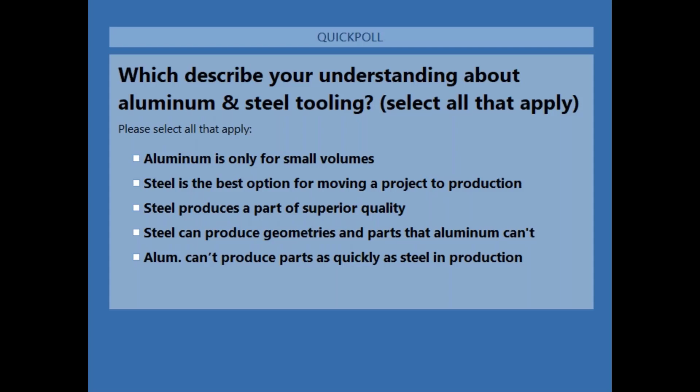So we're going to leave this open here for a good maybe 10, 15 seconds. We'll see as these votes come trickling in, and then I will close and we will look through the answers. Go ahead and get that vote in. Okay, awesome, we're at about 75% have voted. I'm going to give it about 10 more seconds here and then close the poll. So go ahead and get your votes in if you have it. Okay, awesome, I'm going to go ahead and close the poll here, and I'm going to share the results.

So let's take a look here. Everybody can see on their screen, we've got about 48% of attendees today feel like aluminum is only for small volumes. Around a third of you feel like the best option for moving a project to production is steel, as well as feeling like steel produces a part of better quality and that it can produce geometries and parts that aluminum can't. And for the last item, about a tenth of us believe that aluminum can't produce parts as quickly as steel in production. Thank you everyone again for sharing your feedback there. I'll go ahead and hide that and we'll hop back into our presentation.

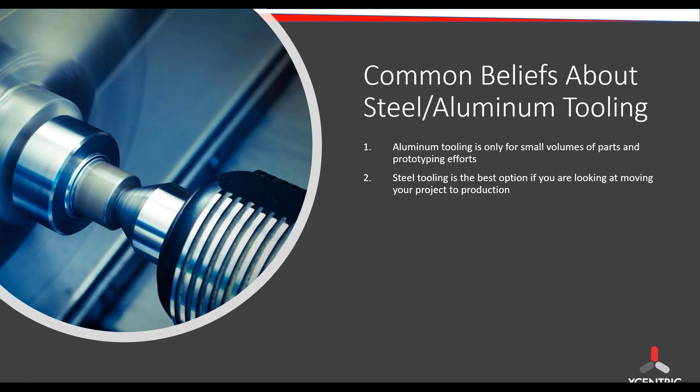So, some common beliefs about steel and aluminum tooling. As you can guess, you've just seen some things relative to exactly this. One common belief is that aluminum tooling is only for small volumes and prototyping, and doesn't work for production. Another is that steel tooling is the best option when moving your project to production, and that steel produces a part of superior quality, can produce geometries that aluminum tooling can't, and that aluminum tooling can't produce parts as quickly as steel tooling in a production setting.

Now one more thing I want to address, which we didn't have in our options, is that the location you choose for creating your tooling isn't a factor in which type of tooling you would be using.

So what I want to do now is serve up another polling question, directly related to that last point. As you can see on your screen, the question is: where the tooling is created has an impact on what mold material is used, true or false? So this one's simple, hit me with a true or false.

Awesome, you guys are flying this time. We're already up at about 75% voted. Give it a couple more seconds here.

Awesome, I'm going to close this one up and share the results with everyone. It looks like about 60% of us on the webinar today feel that statement is true: where the tooling is created has an impact on what mold material is used.

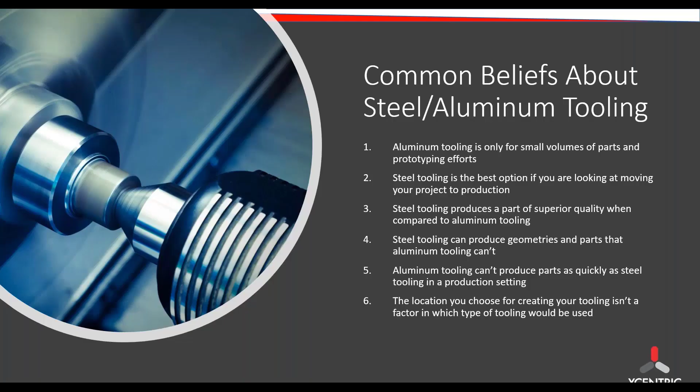Thank you guys, that's super helpful, and it's going to feed right into our next topic here. So let's pop back into our presentation and answer that question: does it have an impact? Yes, where you tool does matter.

Your two major options, as many of you know, are typically going to be the USA and China. There are some other locations, but for our purposes of comparing aluminum and steel, these are the most relevant to the conversation.

The reason tooling location matters is that there are vast cost discrepancies in materials between the US and other countries, notably between aluminum and steel as raw metals in each country. In the USA, aluminum is a much cheaper raw material than steel, making it the default choice for most USA toolers. Overseas, specifically in China, steel is cheaper than aluminum, so the opposite is true, making it the default choice for tooling there.

So I know, as we've all just seen, there's a good split of where we typically get our tooling quotes and orders placed. As you know, in China you typically see a steel tooling quote, and in the US you're going to see an aluminum tooling quote. That's just kind of how it is. So if you're quoting tooling in different locations, you're going to be looking at quotes for vastly different tools. That's the bottom line here.

As a result, you need to be able to make a choice on which one's going to best fit your needs, and be able to compare apples to apples in a scenario where you're actually looking at apples to oranges in terms of the materials.

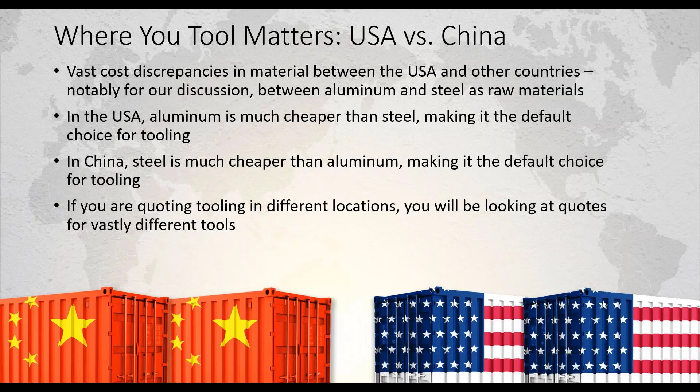So let's talk a little bit about the cost to create and the cost to change your tooling. The cost to create an aluminum tool in the US on average—now realize today there's a lot of factors that go into cost and lead times of injection molding parts, I think we all know that, so wide range of geometries, sizes, materials, all kinds of things—but on average, the cost to create an aluminum tool in the US is going to be a fourth to half the cost of creating a steel tool. In general, aluminum tooling is almost always going to be your most cost-effective option. That is even in my experience when comparing a quote from a China-based vendor for steel tooling to a USA-based aluminum quote. Again, there are a lot of vendors out there, I'm speaking on average and definitely through the lens of where I've worked and where I work now.

Realize that. The second point here is the cost to change. So we talked about the cost to create, now we talk about why it matters that you've had to make a change to your tooling in the past. The cost to make a change to aluminum tooling is roughly a tenth of the cost to change a steel tool, regardless of your location of manufacture. So if you make a steel tool in the US or a steel tool overseas, doesn't matter, it's still going to take typically 10 times the cost to make alterations to that tool. The reason for that is that it's going to take much more time and it's going to be much more difficult, physically speaking, to machine steel versus aluminum when changes are required. As we all know, the reason for that is steel is a much harder material than aluminum, so it's going to take longer and it's going to be a much more difficult process.

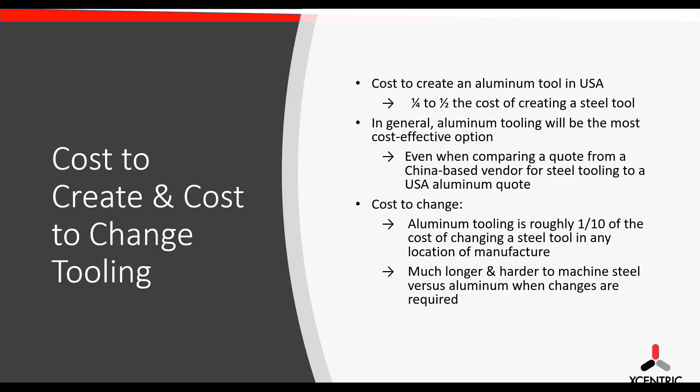So let's talk about, we just talked about the costs, right, to create and change your tooling. What about the time? How long does it take to create an aluminum and a steel tool? And how long does it take to change those tools if you do run into a problem?

Okay, so let's first talk about aluminum. The time to create an aluminum tool, on average, is 15 to 25 business days. That's the time it's going to take to create the tool and have your initial T1 samples to either approve or do iterations on if you need to make changes. Which brings us to our next point.

The time to change an aluminum tool on average is going to be about 5 to 10 business days. So it's going to set you back a week, maybe 2 weeks at most here to change that aluminum tool, typically speaking.

On the other hand, when you're looking at steel, the time to create a steel tool on average is going to be about 35 to 60 business days. Again, in my 2 years of experience of seeing 20 to 40 quotes a day across those 2 years, I rarely ever saw a steel tool below that range in terms of lead times, almost never within a month.

And the time to change a steel tool as well is an important note here. It's usually going to take you about 20 to 30 business days. So not only is it going to take a couple months to make the tool, if you run into an issue and find at T1 samples a problem or later on even, you're looking at 20 to 30 business days, again, going back to how hard that material is to change your steel tool.

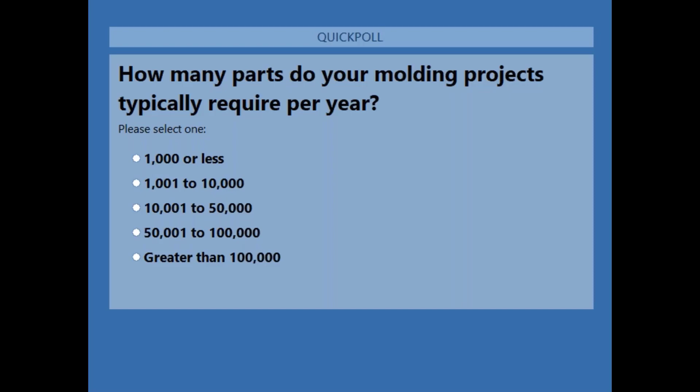Awesome, we're right up at around 75%. Give it a few more seconds here for our answers to trickle in. Awesome, let's close this out here.

Let's share our results. Okay, so you can see what we have going on here. We've got about a fifth of us need 1,000 parts or less per year on their tooling. About a quarter of us are needing somewhere in the realm of 1,000 to 10,000 parts. Another quarter of us from 10 to 50,000. And some of us as well, as you can see here, are needing the greater volumes. So 50 to 100,000 or more than 100,000 parts per year.

Thank you, this was very helpful. And it leads again right into our next topic. So let's talk about your tool life comparison here, okay? So how much volume should you be able to produce with each type of mold?

Sorry, I meant to serve one additional question here. So let's go ahead and serve that too. Let's launch this. Okay, so this question here is going to be which best describes when to use an aluminum tool for tooling.

For prototyping of fewer than 50 parts, for prototyping of up to 500, for production of up to 5,000, for production of up to 25,000, or for production of up to 100,000 parts per year. Give me some votes here, tell me what you think. Awesome, and we've got about 70-75% voting here again. So let's get these last couple in over the next 5 seconds and we'll close it up.

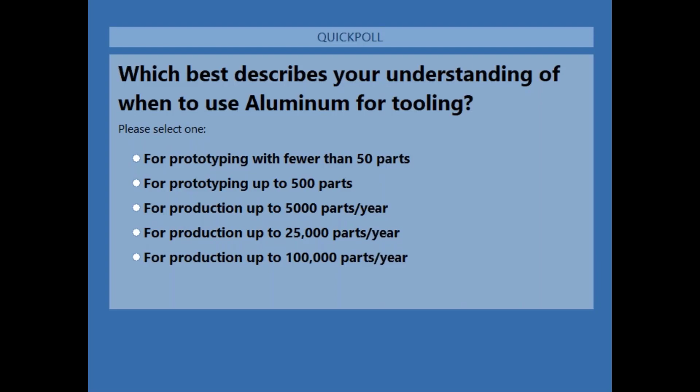We've got about 5% of folks feel like aluminum is for prototyping with fewer than 50 parts. About a quarter of us feel like it's for prototyping of up to 500. Half of us feel like it could go into production of up to 5,000 parts a year. 13% feel like it could get to production of up to 25,000 parts a year, and 3% of us feel like it could get all the way up to 100,000 parts per year.

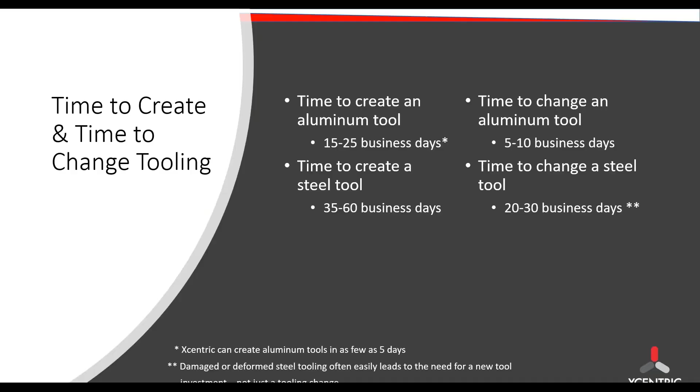So tool life comparison again. Let's figure out how many parts you can get from each type of tool. When you're looking at P20 steel tools, which is the type that's going to be defaulted to overseas in China, you're looking at an average tool life of about 50,000 to 100,000 parts, and this is dependent on material used. We'll talk more about that in a bit, but wanted to note that that is material dependent. On the other hand, in the US, we're going to default to a QC10 aluminum tool. The average life there is going to be 10,000 to 25,000 parts, again depending on the material used. So it could be higher, could be lower, just depending on that material.

One quick note here that is really important. Xcentric guarantees our molds for life, meaning we're going to cover the cost of maintenance on your tool or even total tool replacement if it comes to that down the line. So you're never going to have to invest more money to keep your tooling running from wear and tear. And again, when you do need to make changes to aluminum, it's much easier, quicker, and more cost effective. So that is a good note here.

As a result, the answer to our previous question is that it really can be used for up to 100,000 parts per year here at Xcentric. That's something that we very commonly see and is definitely within our wheelhouse, if you will.

Let's hop into our next topic here and our next question. That question is going to be, how quickly do you typically need your tooling completed and your T1 samples delivered for approval from the time of your order? Do you need them typically in less than a week? Do you need them in a couple of weeks, maybe 1 to 2? Do you need them between 2 and 4 weeks, typically speaking, 1 to 2 months? Or do you usually have more than 2 months to wait before you need your tooling completed and T1 samples in hand?

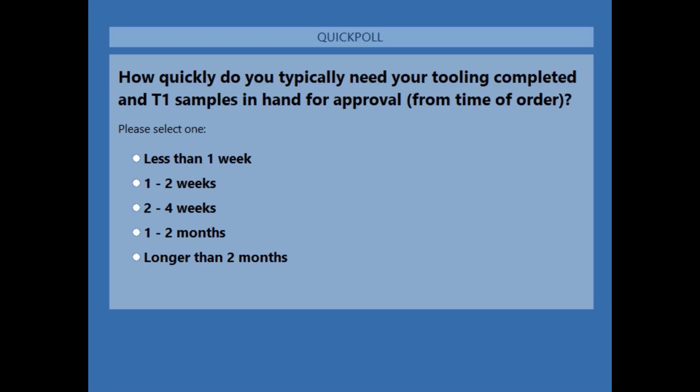So typically speaking, folks on this call, 5% of us are looking at less than a week for needing tooling and parts. That is very quick. Some of us, about 14%, are looking at 1 to 2 weeks, still pretty quick. 36% of us, 2 to 4 weeks. 41% of us, 1 to 2 months, so you have a little bit of time. And 3% of us are able to wait longer than 2 months for tooling and T1 samples.

So, you know, and again, you see a wide variety across different industries, so that makes total sense. That checks out for me. In my experience, you do see a wide range of needs there. But you can see most people falling within that 2 to 4 week time frame, as well as that 1 to 2 month time frame. But you do have some people that need it faster. About 20% of us need it faster than 2 weeks. So let's note that.

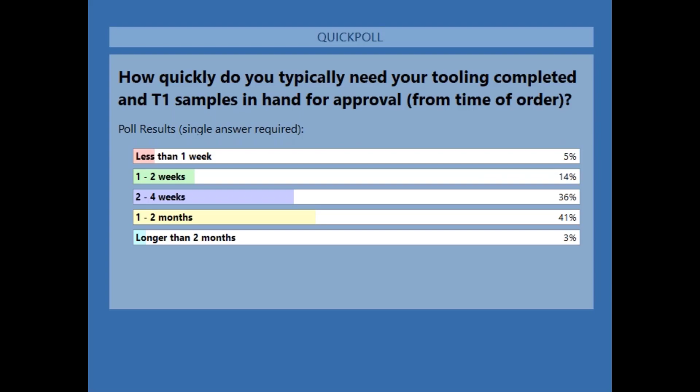All right, and let's hide these results and hop back over here. So our next topic is fill flow and cycle time. And you're going to see really quickly why this is important and why it's related to how quickly you can get your parts in hand. Thermal conductivity of aluminum is 5 times that of steel, okay? We can see as a result of that, many things. So if the metal is more conducive to thermal energy, that means it's going to heat up quicker. It's also going to heat up more evenly across that mold.

Secondarily, it's going to cool down much quicker, and much more evenly across that mold and the part that you're creating within. As a result, plastic material is going to flow longer distances with less injection pressure within an aluminum mold because of that thermal conductivity.

Aluminum molds fill faster and more evenly, again because of the evenness of heat across the mold. Three, parts have minimal warp and much better dimensional stability, giving a higher acceptance rate on parts. The study we've used states it's about 35 to 40% higher acceptance rates. And number 4, your cycle time is less, significantly less in some cases, due to the quicker heating and cooling I just mentioned, meaning faster creation of your parts using aluminum tooling versus steel.

So let's zoom in and focus for a second on that cycle time, going back to why I asked you that question. If it's taking you 12 seconds to get a part off the mold versus 21 seconds, over many parts and moving through the needs you're going to have, it means you can get parts much quicker.

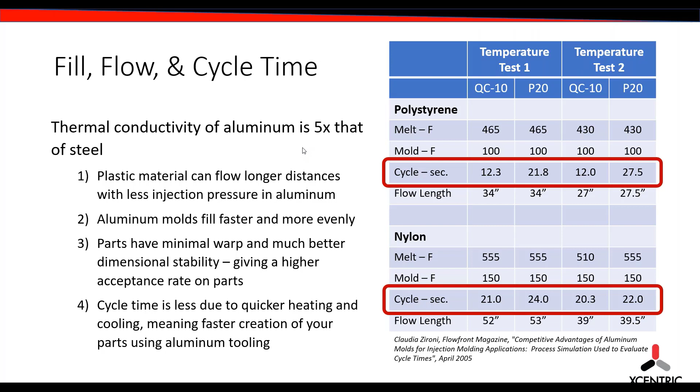Why does that matter? We just talked about why dimensional stability matters in terms of the two different mold materials, but let's also talk about size and complexity of parts. Aluminum tools will typically offer better results on long, large, or complex parts. Again, it goes back to what we just spoke about: the thermal conductivity of the material is better, so the flow rate and fill advantages are also going to be prevalent with aluminum tooling. You're able to create those long, weird geometries or large geometries and get better fill and flow.

On the other hand, steel tooling is better for parts with very thin features. The reason for that also goes back to some of the things we've already discussed. The strength of steel sometimes goes against it and sometimes operates in its favor. When you need to change or create steel tooling, it takes a while, but when you have parts with very thin features, the strength of that steel is now a huge asset because it can tolerate much higher pressures than aluminum can, since it's a softer metal.

The pressure of that injection needed in those thin walls and thin features can typically deform an aluminum tool with ease. So that is an area for sure, if you have very thin features on a part, steel tooling is going to perform better.

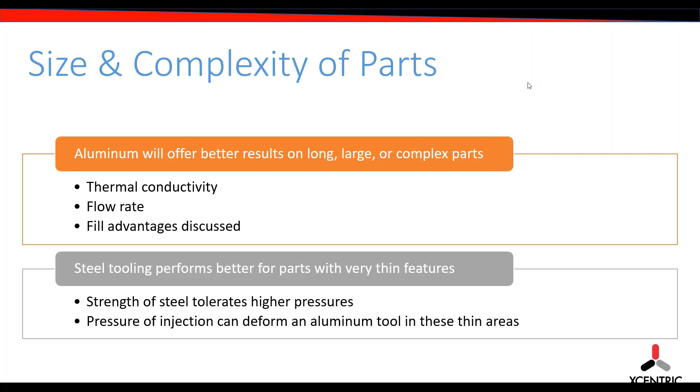The exception here, and where steel tooling is going to be the best option due to the above average wear and tear and stress put on tooling, you're going to see that exotic materials like Ultem that require very high heat are going to be best for steel. You'll also see that abrasive materials, including high glass fills or other additives, are also going to be much better fits for steel tooling. The reason being, again, it's going to hold up better to that wear and tear.

And even if someone does offer a lifetime mold guarantee on an aluminum tool, you don't want to have to be replacing that every couple thousand parts. It's not going to be very conducive to getting those parts quickly. So that is definitely a scenario: if you have exotic high heat materials or abrasive materials, steel tooling is certainly going to be the better option.

In terms of surface finishes, this is a really interesting topic. The typical standard in the industry is the SPI scale. You also have mold texture finishes, abbreviated MT, that you'll see. The same options, typically speaking, are going to be available in either tooling scenario, with one pretty special note.

SPI A1 as a finish is the highest level of polish. It is an optical clarity that is used very often in medical device and those kinds of equipment. You need special facilities and equipment to achieve that level of finish. It takes a ton of polishing. One thing to note about the finish scale is you must go in order.

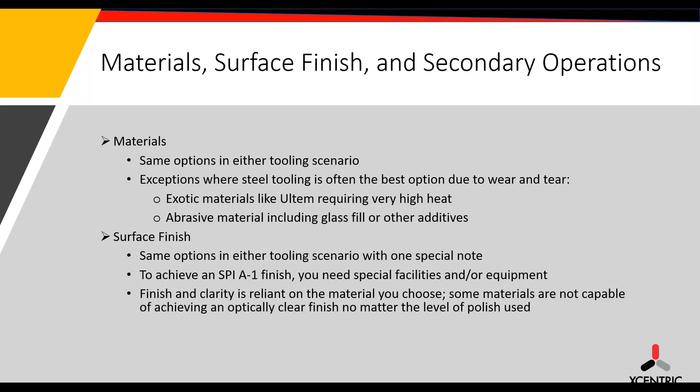Additionally, finish and clarity is much more reliant on the material you choose for your plastic parts versus the material of your mold. The reason is some materials are not capable of achieving an optically clear finish no matter the level of polish you use, typically because the natural color of that resin or material just can't get to that point. It's going to be fuzzy. So that's one important note on surface finish.

And then secondary operations. Whether you want to ultrasonically weld parts together for assembly, or you need additional threading or tapping after molding your parts, whatever that looks like, the same secondary operations are going to be available for your parts after tooling, regardless of your tooling material choice. After all, either one creates a plastic part, right? So that's a special note there.

Let's serve kind of a finishing question for us, and it's going to look a little familiar but a little different. Let's launch this. Our question here is: how many of those original common beliefs that we addressed, there were 6 of them, how many do we think are correct after covering the material we did today? The options for you are 1, 3, 5, all, or none.

This one's taking a bit longer for answers. I know this is a little more critical thinking question, so definitely give you a little more time here. Give you 5 more seconds. Just get your last answers in, and don't be afraid. I understand we covered a lot of material, so don't want you to feel like you don't want to put an answer in because it may be wrong. That's okay.

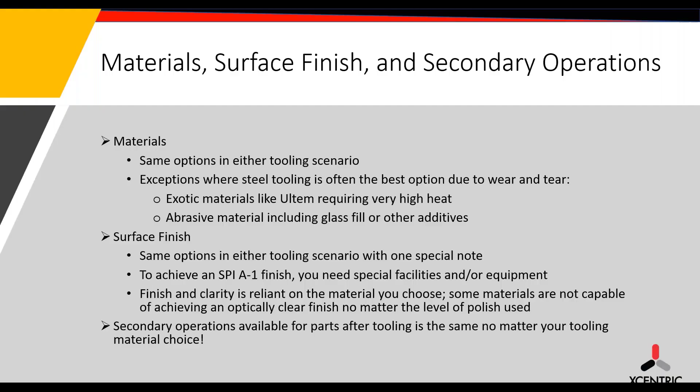So I apologize, it was a bit of a trick question, and actually a little over half of us are correct here. Good work to those who selected 1 or none. Let's walk through and let me explain that. Let's hide this and hop back into our presentation. So let's revisit these. Earlier I called them common beliefs, but this time I'd probably like to call them common misconceptions about steel and aluminum tooling.

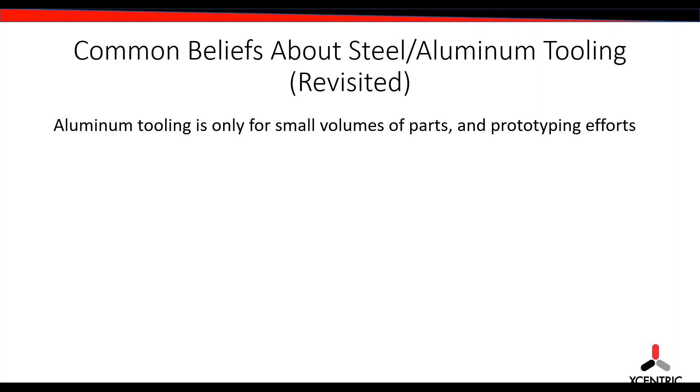The first one: aluminum tooling is only for small volumes or prototyping efforts. I think we debunked that one today. We talked about how aluminum tooling is typically going to get you anywhere up to maybe 25,000 parts, sometimes higher. Here internally at Xcentric, we do guarantee those for life, and typically up to 100,000 parts a year is no problem. So that is not prototyping, that is most certainly not small volumes. I would say this one is debunked.

Second, steel tooling is the best option if you're looking at moving your project to production. Again, we spoke about how you can go all the way to production with aluminum tooling, depending on what production means to you. If your production looks like more than 100,000 parts, steel tooling definitely may be the best option. If, however, you're looking at less than 100,000 parts a year and that still means production for you and your business, then aluminum tooling, in my experience, is going to be your best option. So as an absolute statement that it's always the best option when moving to production, I'd say this one is false.

Third, steel tooling produces a part of superior quality compared to aluminum tooling. We debunked that pretty thoroughly in the fill, flow, and thermal conductivity slide. At the end of the day, steel tooling is going to take longer to heat up and cool down.

It's going to do so less evenly, and you're going to run into less dimensional stability, as well as more blemishes and problems with warp and sink and things of that nature. So this one has been debunked.

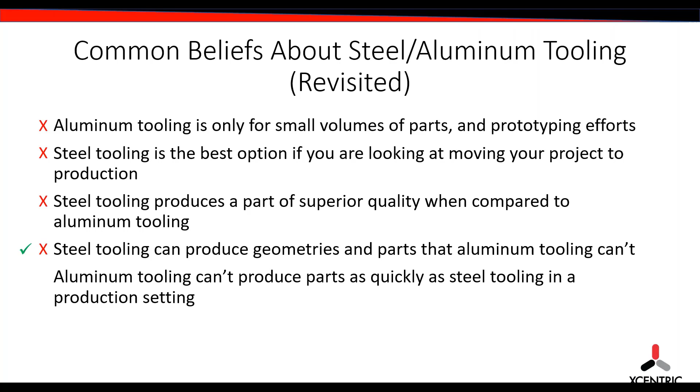Aluminum tooling can't produce parts as quickly as steel tooling in a production setting. Going back to that cycle time slide where we highlighted cycle times of aluminum tooling versus steel tooling, we're looking at a pretty big discrepancy between how fast you can get parts off an aluminum tool versus steel, in favor of aluminum. So this one is debunked.

Last but not least, the location you choose for creating your tooling is not a factor in which type of tooling would be used. We debunked that one right out of the gate by saying, obviously in the US, aluminum's cheaper, and in China, steel is cheaper. So you're typically going to see different tooling materials based on the location of manufacture.

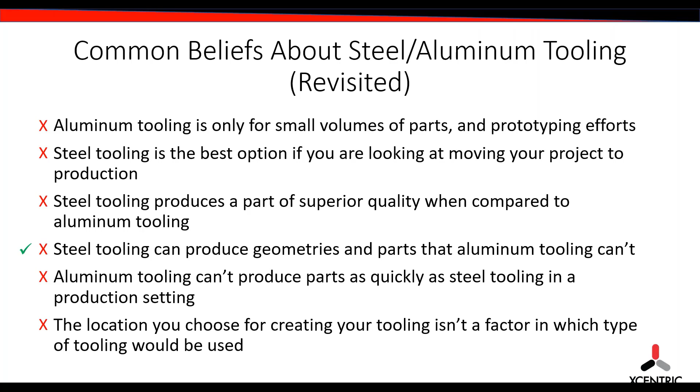Okay, so let's get down to what I promised you. I told you I would tell you today pretty definitively when you should use each type of tooling. So when should you use aluminum tooling? If your project requires 100,000 parts per year or less. Again, this is definitely dependent on your partner, and this is specific a little bit to Xcentric, so I will acknowledge that. Depending on your partner, that number may be a little bit lower, but for us, aluminum is the right choice for projects requiring up to 100,000 parts per year or less.

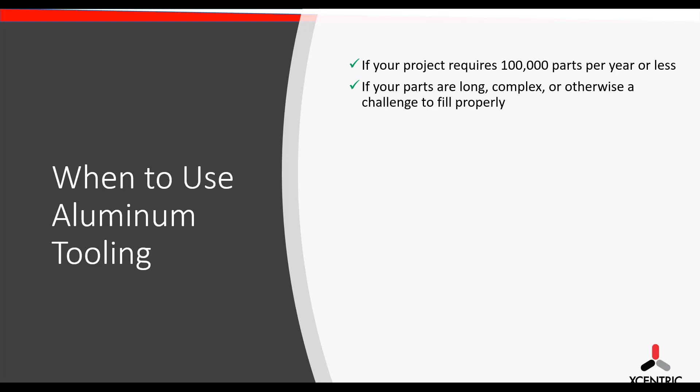If your parts are long, complex, or otherwise a challenge to fill properly, aluminum is the advantage. If your parts require the best dimensional stability and the least cosmetic defects possible, if your budget requires a lower upfront cost, if you need the tooling quickly—because if you need tooling within a month, steel almost isn't even an option for you. If your budget and timing don't have large amounts of added wiggle room for mistakes or changes, as we saw, it can be pretty costly and time consuming to make those changes with steel.

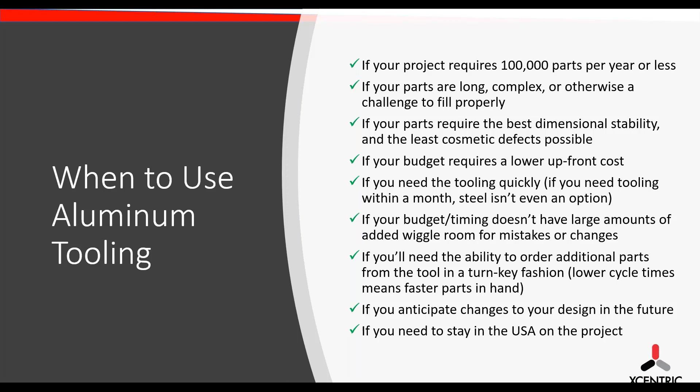If you need the ability to order additional parts from the tool in a turnkey fashion, again going back to the lower cycle times with aluminum, meaning faster parts in your hand. If you anticipate changes to your design in the future, as it's going to be hard, sometimes impossible, and definitely costly and time consuming with steel. If you need to stay in the USA on your project, if you have ITAR requirements, things like that, that's a reason you would want to stay in the US and therefore would use aluminum tooling.

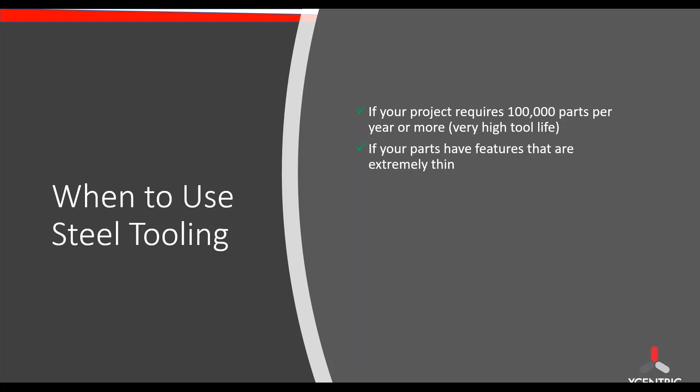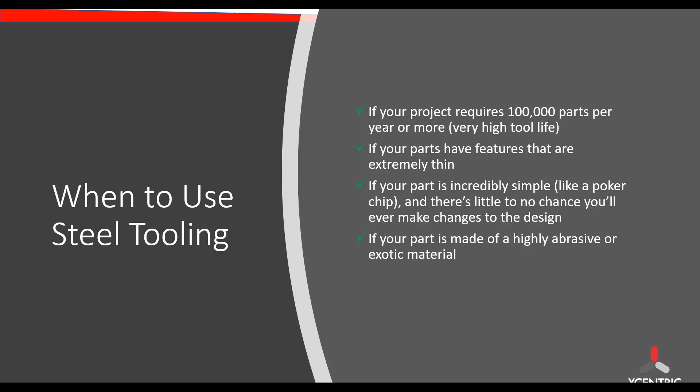Now, when should you use steel tooling? Because again, a lot of folks out there offer both, and both are very valid options with their place. You should use steel tooling if your project requires 100,000 parts per year or more. If you need a very high tool life, definitely go with steel. If your parts have features that are extremely thin, and therefore there will be thin portions of the tooling, you should use steel. If your part's incredibly simple, like a poker chip, where there's little to no chance you're ever going to make changes to your design, steel is a great choice because you're going to be making a very high volume and not need to make changes. If your part is made of a highly abrasive or an exotic, high heat needed material, definitely use steel tooling. And if you have a preference to source the parts or the mold specifically overseas and from China, it doesn't make sense to go with aluminum tooling—steel is going to be the best option.

Now, given our discussion today, I'm going to conclude with a final question, and there is absolutely no wrong answer to this. I just want to know where you're at based on what we just discussed, when both are the correct fit. So answer this for me if you don't mind, it's the last thing I'll ask from you, I promise. Given our discussion today, which type of tooling do you think is generally going to be the best fit for your organization? And again, there's no wrong answer—it's okay if the answer is steel, it's okay if the answer is aluminum. But which one would typically meet your needs most completely?

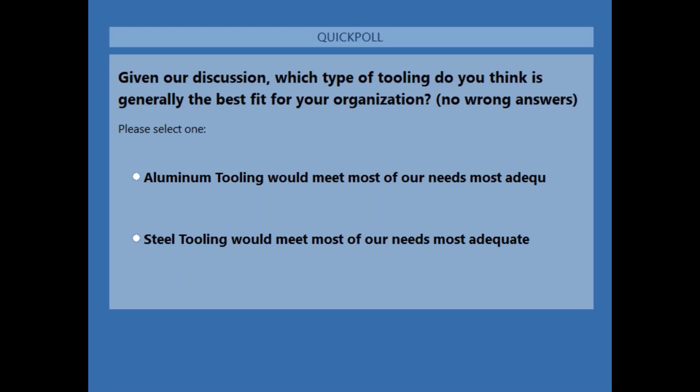Awesome, we're at 70%. Give it a couple more minutes here, or seconds. I'm going to close this up and share the results.

So 65% of us here on the webinar today feel like aluminum tooling would meet most of your needs most adequately, and 35% feel like steel tooling would meet most of your needs most adequately. And that's awesome, guys. It doesn't matter what the answer is here. As I've covered today, both are going to be good options for different cases, and I've worked across many projects for both. So definitely both are very valid and good options. Either way you need to go, I just wanted you to be a bit more informed and feel a little bit more confident the next time you're looking at a project and trying to discern which one would be the best fit.

So with that, I'm going to close up and turn us back over to Mark for some Q&A. Thank you, everybody.